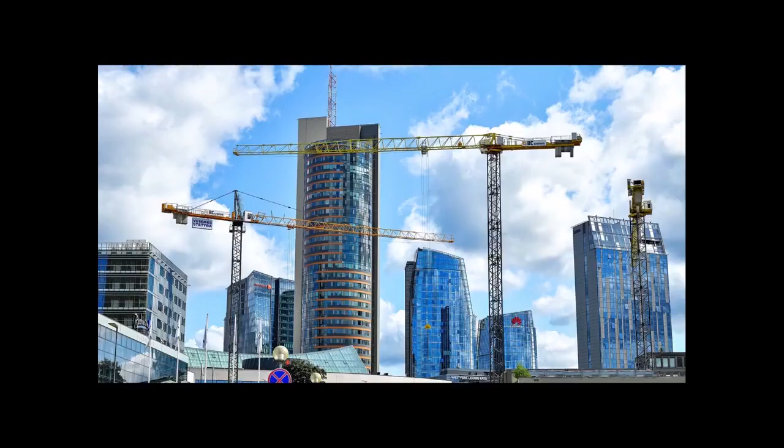The target global market for smart homes and offices was valued at $33.53 billion in 2020 and is expected to reach $67.69 billion by 2026.

The Global Smart Homes and Offices Market Report from 2021 to 2026 presents key companies operating in the smart homes and office market globally, such as Siemens, Johnson Controls, Cisco Systems, Google, Philips Lighting, Schneider Electric, and others.

Next, we briefly describe existing solutions. By protecting health, optimizing room conditions, and maximizing comfort, Siemens Smart Building, for instance, improves occupant productivity and reduces carbon footprint.

Johnson Controls uses artificial intelligence, machine learning, data analytics, and cloud technologies to enhance comfort, safety, employee performance, and job satisfaction. Cisco enables highly customizable and adept workspaces to improve safety, comfort, productivity, business outcomes, and energy performance to reduce their carbon footprint.

The sequence of the React's practical application is as follows. Firstly, maintenance of building or mobile workplace smart spaces at specific geographic locations is performed.

Secondly, real-time collecting of data on temperature, humidity, air pollution, vibration, lighting intensity and colors, number of users, and other features pertinent to the smart spaces is carried out by employing a set of devices.

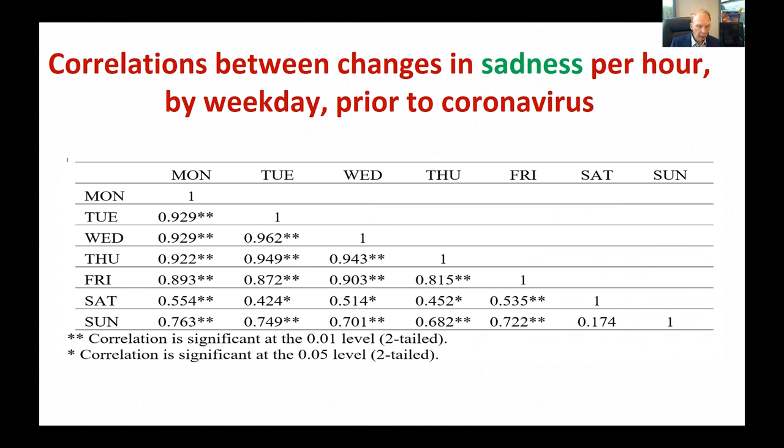Performing a multiple criteria analysis on the quality parameters of a building's smart spaces, considering the effect data of the users with these facilities, by applying neuro decision making and neuro correlation tables, establishes the most effective alternatives from the obtained quality parameters pertinent to the potential smart spaces of a building.

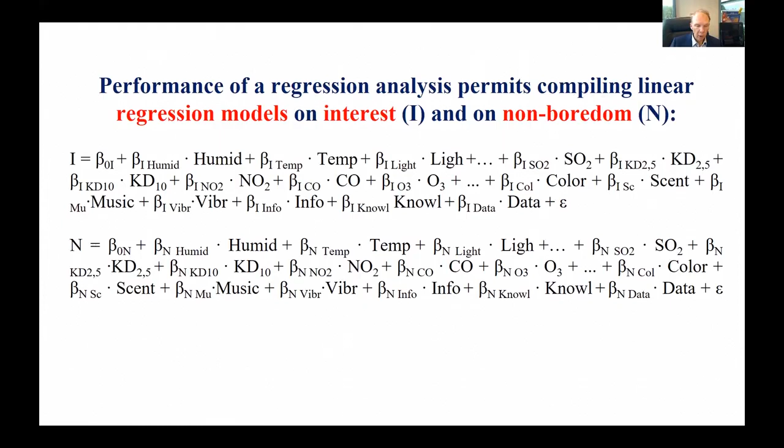As an example, performance of a regression analysis permits compiling linear regression models on interest and non-boredom.

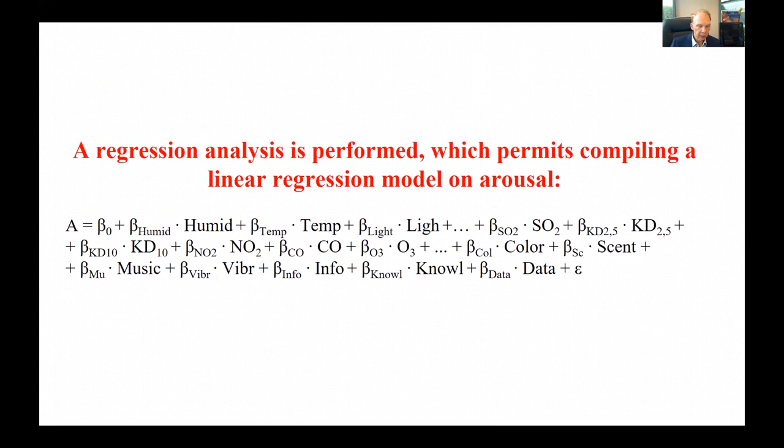Compiling neuro decision making and neuro correlation tables based on the performed multiple criteria analysis on the available data is accomplished during the 10th and 12th stages.

Neuro correlation tables are developed based on self-learning regression model equations. Emotional and affective states management algorithms describe the operation of this equation.

In the 13th stage, saving the results of the customization of the quality pertinent to the smart spaces in the decision support system's smart databases is carried out.

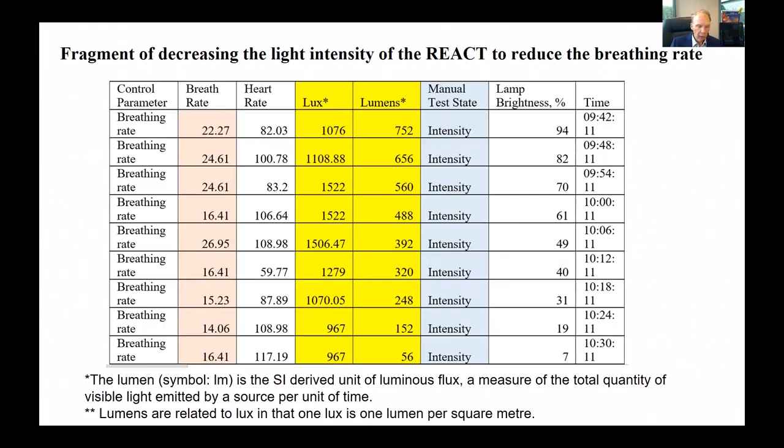Next, transferring the personalized values such as temperature, humidity, air pollution, vibration, lighting intensity, and colors, scent into a renovated building's smart spaces is performed.

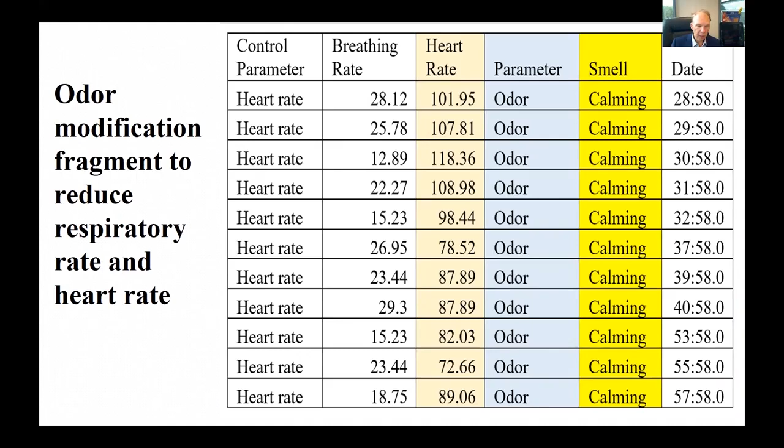Finally, configuring, modifying, and maintaining quality of the renovated building's smart spaces according to their new personalized parameters is executed.

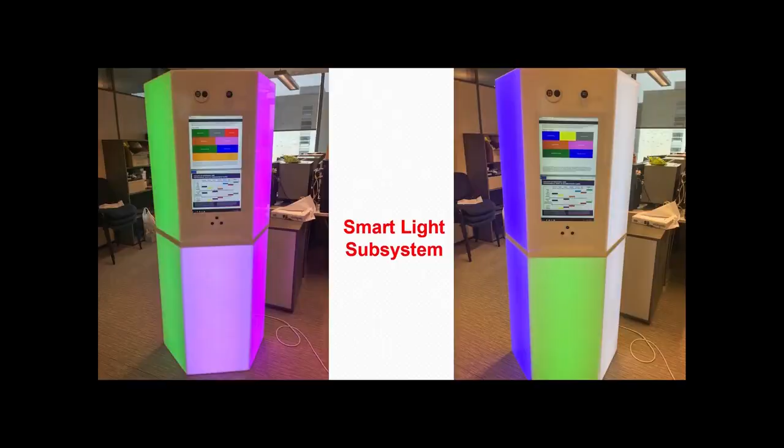The Neuro Questionnaire and System on Renovation Acceptation analyzes users in an integrated manner, looking at their emotional states—happy, sad, angry, frightened, disgusted, and the like—affective states—bored, interested, confused, and the like—and physiological states, along with their valence and arousal, which are React data.

Additionally, it establishes the levels of work productivity, learning effectiveness, and whether users are interested and not bored. Plus, it takes into account the season, the day of the week, and circadian rhythm. Thus, React is an aid for establishing user states much more accurately.

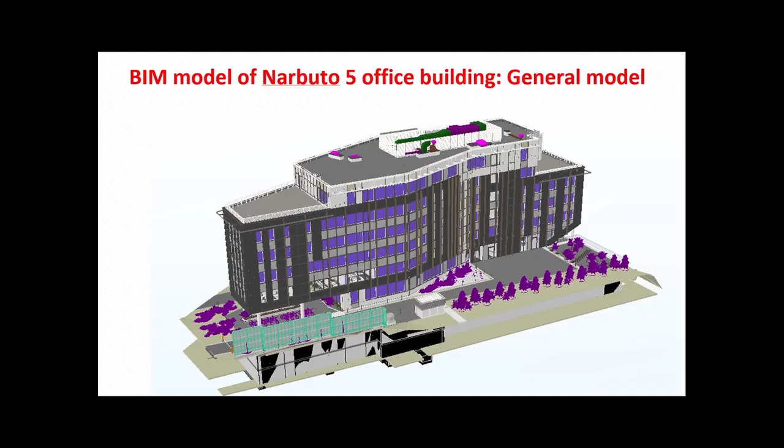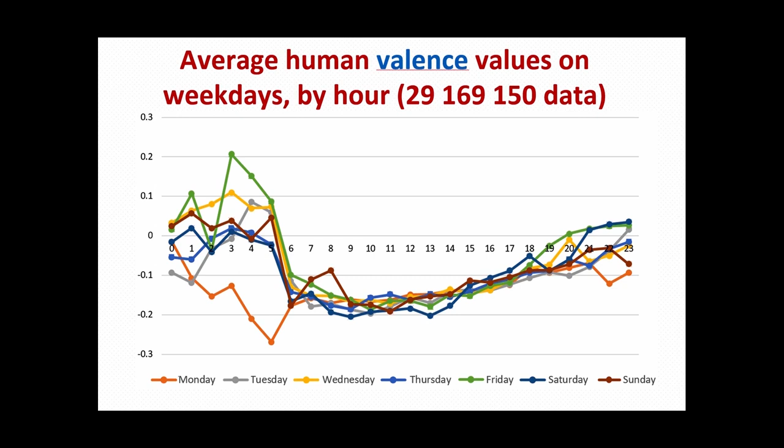React involves the use of neuro-decision-making and neuro-correlation tables to compile all the possible alternatives pertinent to qualitative customized building smart spaces. The aspects of customized quality include level of lighting intensity and colors, scents, media, information, knowledge, data, activities, learning materials, games, music, videos, temperature, humidity, air pollution, brainwaves, vibrations, and the like.

React assists in retaining the desirable parameters to the customized quality of the building's smart spaces much more accurately. React also applies, comprehensively, multiple criteria analysis methods such as INVAR, biometric technologies, and intelligent technologies for establishing various values, such as user-perceived, hedonic, and utilitarian, of a building's smart spaces. This way, the value pertinent to smart spaces established with the assistance of React proves to be far more accurate for users. The 6 images you'll now see illustrate 4 features offered by the system from multiple others available.

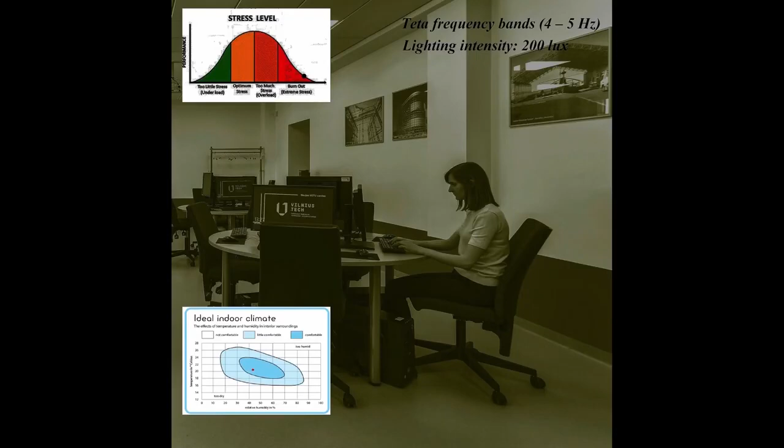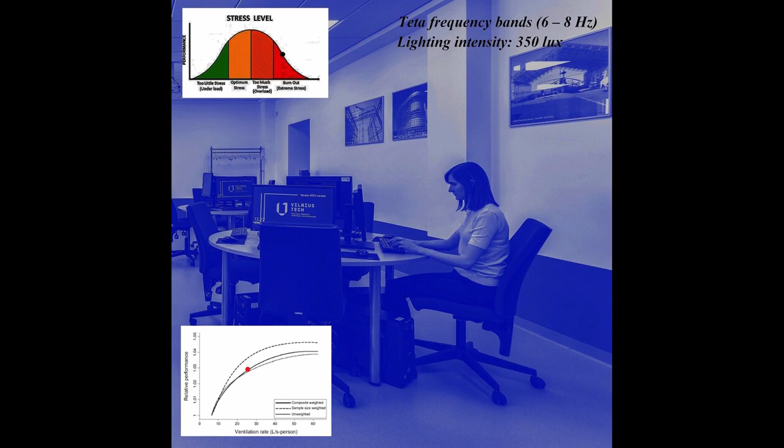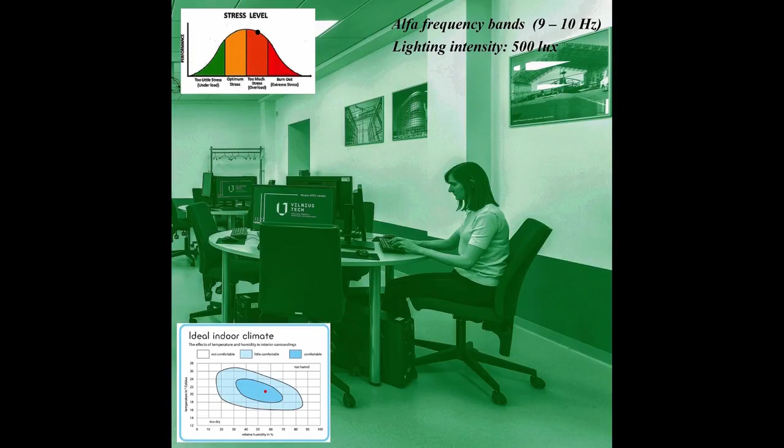In the top left corner of each image, you see a chart of the user's stress and performance levels based on the Yerkes-Dodson law. In the top right corner, you see the frequency bands generated by the vibroacoustic therapy system, VTS 1000, Zen Evolution or other, and the intensity of lighting in the smart space. The bottom left corner shows either a chart of the effect indoor climate, temperature and relative humidity makes on the person's comfort level, or the way the relative employee performance is linked to the ventilation rate.

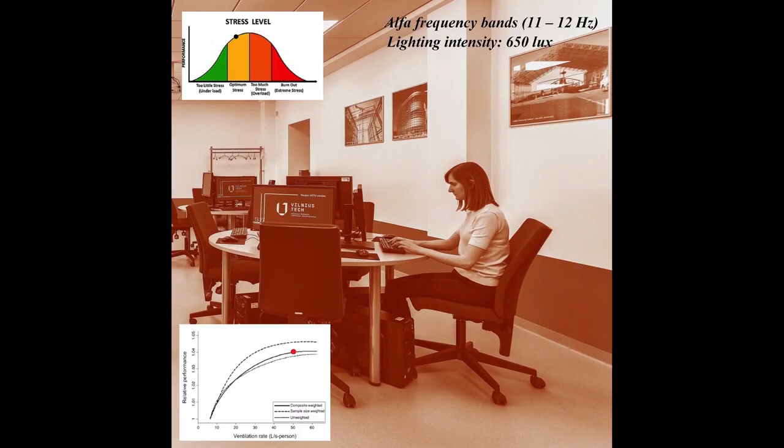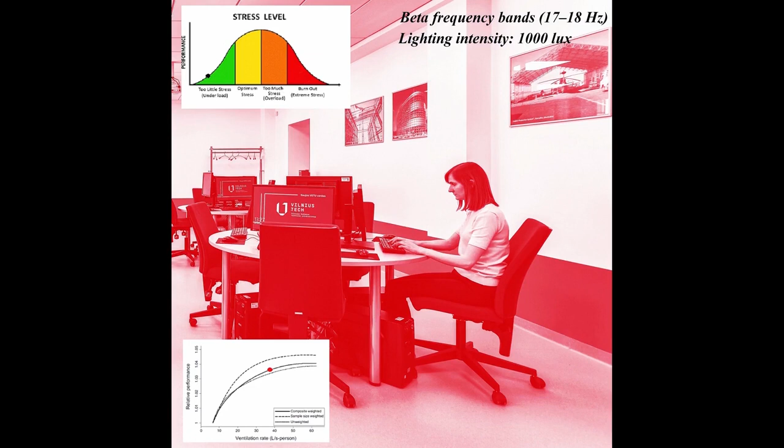The React system: 1. Maintains best quality for a personalized indoor environment, boosting work productivity or learning effectiveness, interestingness, and non-boredom. 2. Tackles climate change mainly by managing energy efficiency of smart spaces. 3. Establishes and maintains needed user emotional and affective states with React. 4. Integrates React with BIM to enlarge BIM's application to the field.

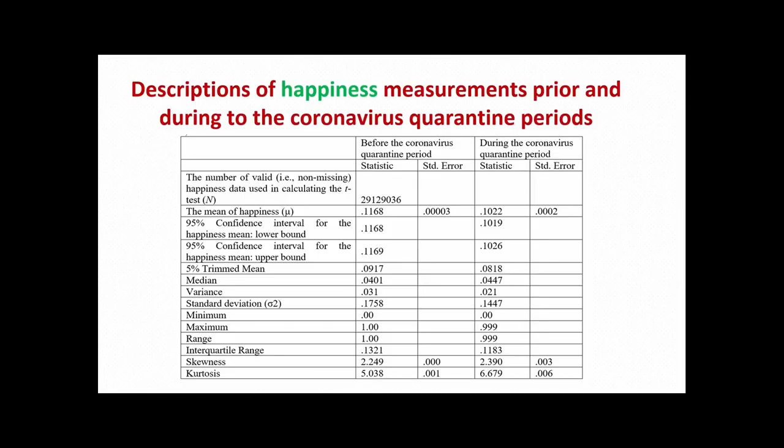Currently, there are several known technological solutions in the field of customized quality control of smart spaces pertinent to buildings. They encompass the technical solution for establishing physiological parameters and determining the equipment that describes the parameters of human emotions. They, however, do not directly include the proposed method for customized quality control in building smart spaces, nor the equipment designated for its implementation.

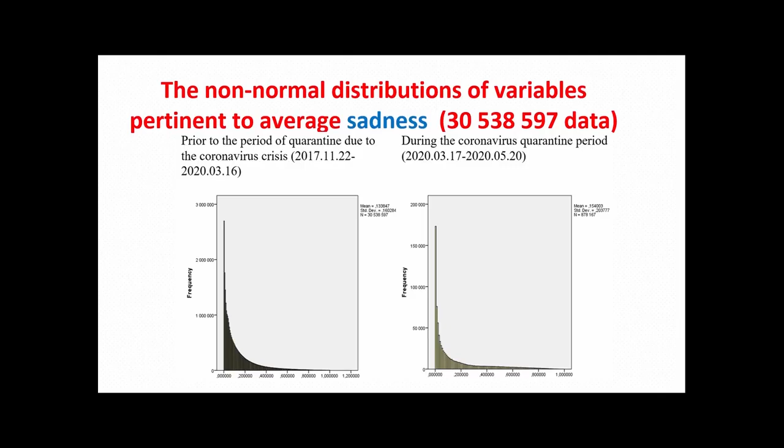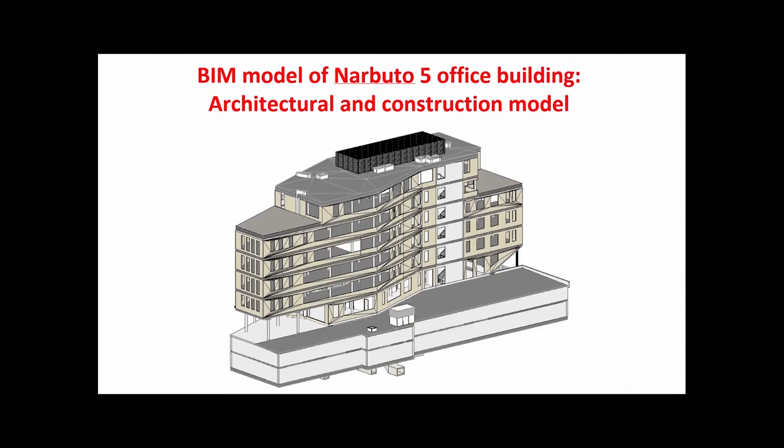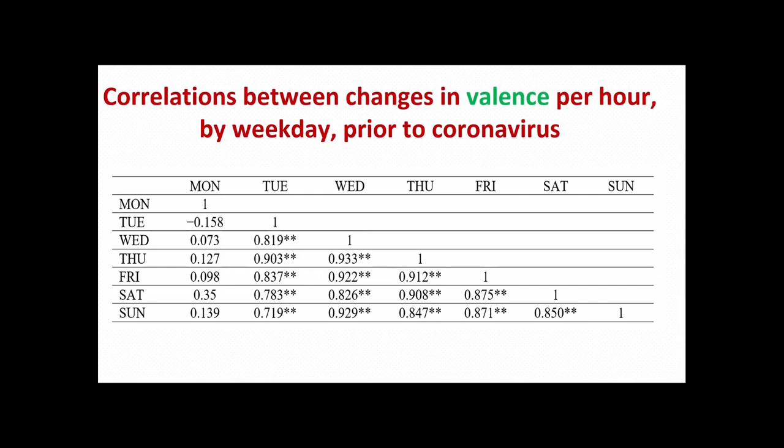The features that make React presented here exceptional and innovative are the following. React has the capacity to analyze, in an integrated manner, the emotional states, happy, sad, angry, frightened, disgusted, and the like, affective states, bored, interested, confused, and the like, and physiological states of users, their valence and levels of arousal, work productivity or learning effectiveness, interest, and non-boredom. This analysis also considers the season, the day of the week, and circadian rhythm. Thus, React helps to determine the state of a user much more accurately.

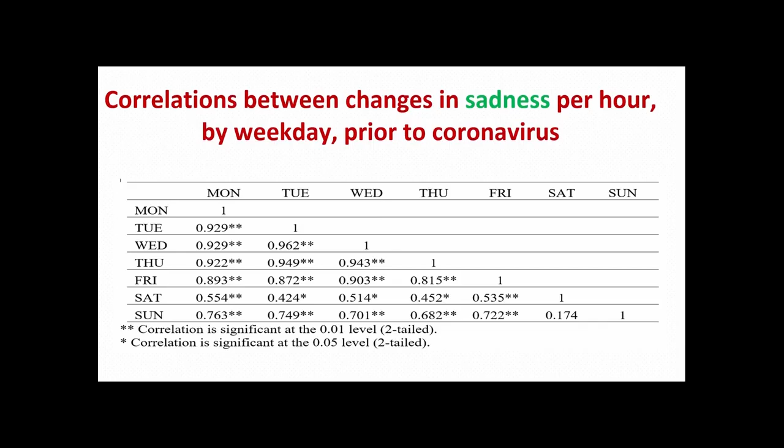React compiles neuro-decision-making and neurocorrelation tables that exhibit the alternatives pertinent to the qualities of customized smart spaces of buildings. Then, all the possible qualitative alternatives for building smart spaces undergo analysis. This is the reason our React presented here helps to uphold the customized quality of building smart spaces much better.

React serves to establish the various values such as user-perceived, hedonic, utilitarian of building smart spaces by applying a set of biometric and intelligent technologies.